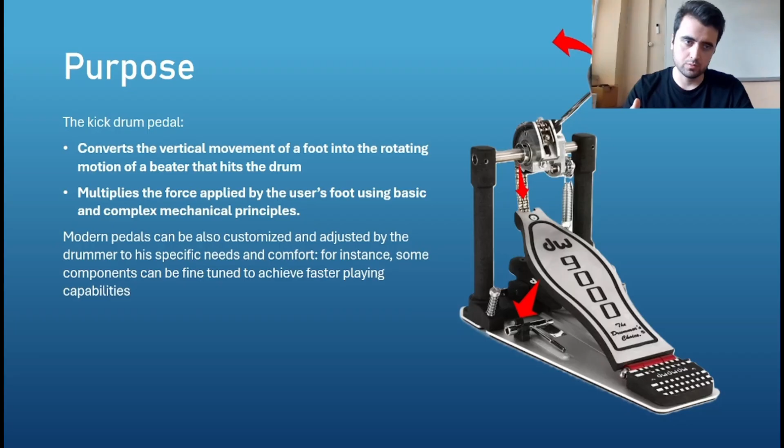Let's have a look at the working principle. The purpose of this equipment is to change the downward push of your foot into a spinning motion to hit the drum, multiplying the force that you applied.

Now the components and their purposes. The first one is the footboard, the plate on which the drummer's foot rests, which provides the transition of the player's movement into energy. There are two types: short boards, which have a separate heel piece and give a classical feel, and longboards, which are one single long piece, more sensitive and better for fast foot techniques.

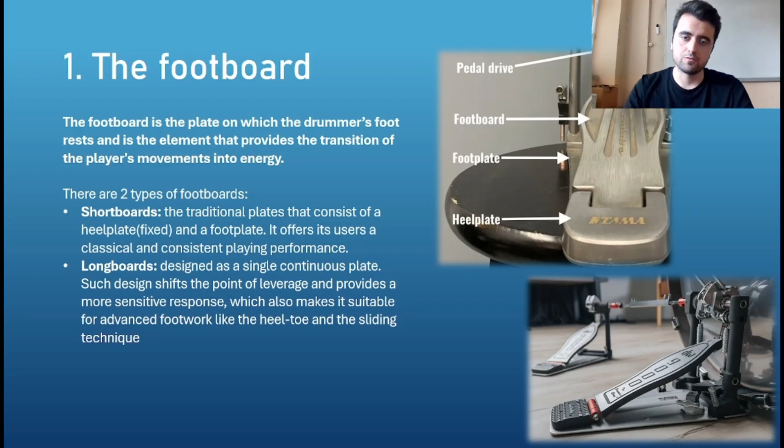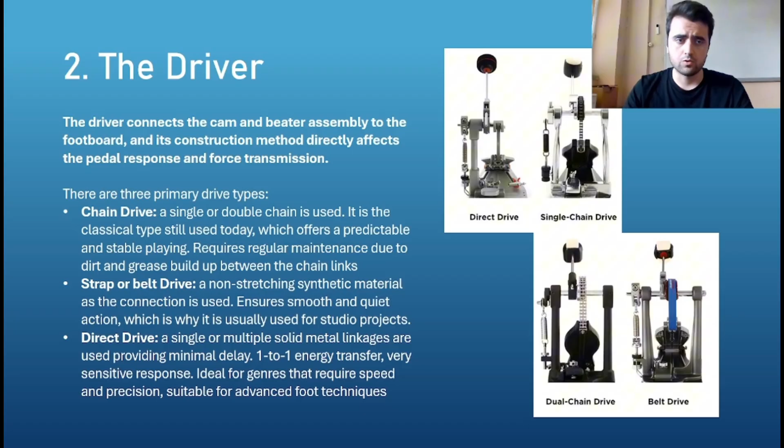The second component is the driver, which connects the footboard to the top of the mechanism. There are three primary drive types. First is chain drive, stable but needs cleaning. Then strap drives use a belt, so they are very quiet and smooth. And there are direct drives, which use solid metal for energy transfer, perfect for extreme speed.

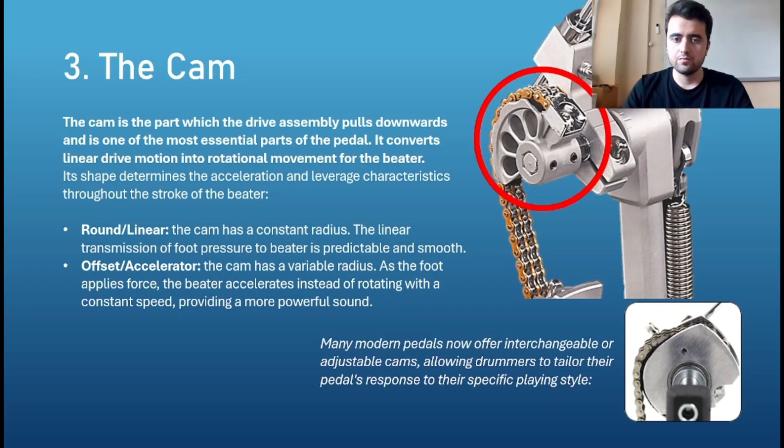The third one is the cam, which turns the pulling motion into rotation. There are two primary types: a round cam gives a smooth, regular feel, while an offset cam is shaped differently - it accelerates the beater at the very end of the stroke for a much harder hit.

The fourth one is the beater, which strikes the drum. Its material changes the sound completely. For example, felt sounds warm and punchy, plastic sounds sharp and clicky, and wood is very loud and bright.

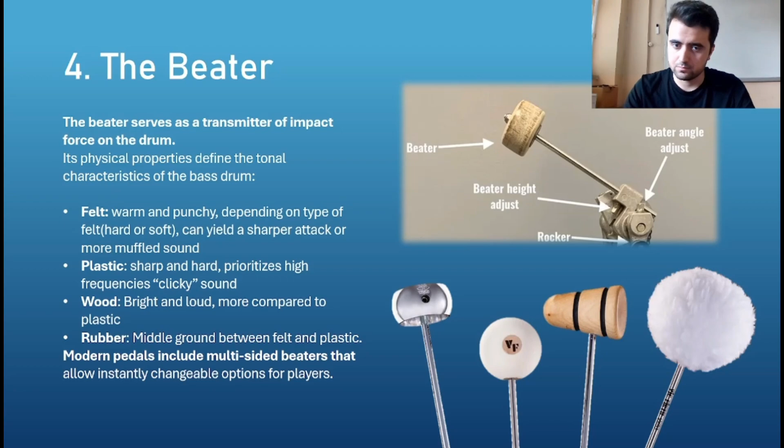Finally, the fifth component is the spring mechanism, which pulls the pedal back up. A tight spring bounces back quickly, good for fast rock or metal music. A loose spring feels lighter and smoother, perfect for the genre of jazz.

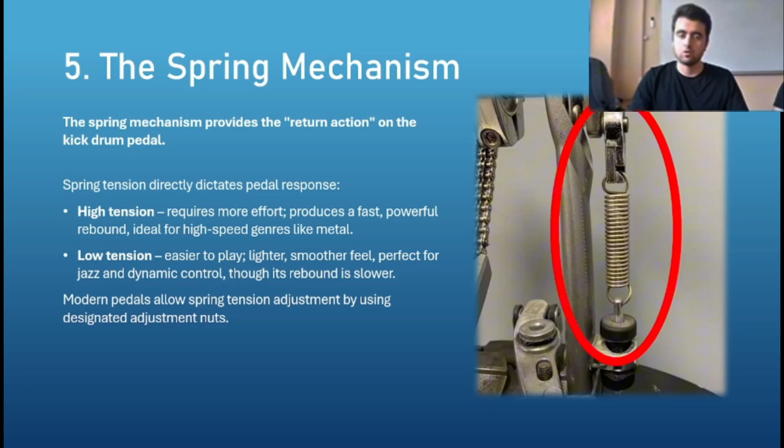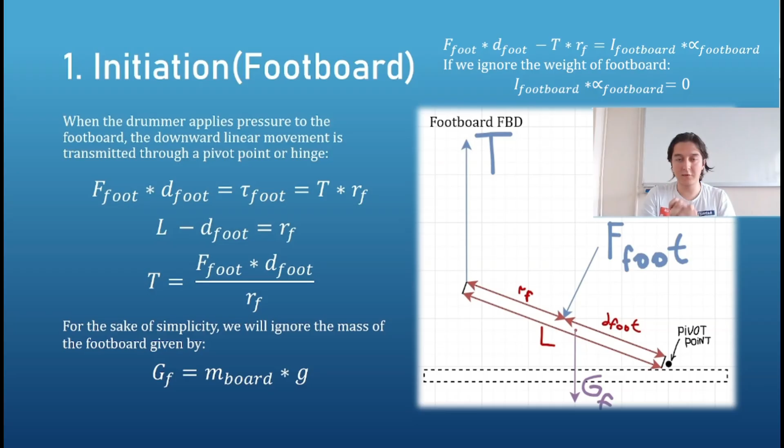I'm going to start with the first step, the initiation part: the footboard. When the drummer applies pressure to the footboard, the downward linear movement is transmitted through a pivot point or hinge. In our calculation, we're going to ignore the weight of the footboard to simplify our calculations.

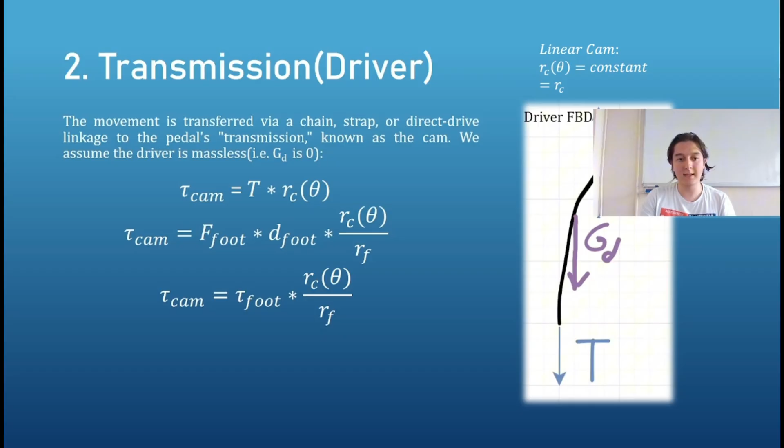In the second part, the transmission part, the driver: the movement is transferred via this driver to the cam. I'm going to show you the purpose of the cam in the next slides, and we're going to assume the driver is massless so that our tension is going to be the same.

In the third part, the conversion part, the cam part: the cam converts the linear movement into rotational motion for the beater so that we can calculate our kinetic energy. There is our torque formula: torque of the cam minus torque of the spring. We're going to ignore the torque of friction and the torque of the weight of the beater.

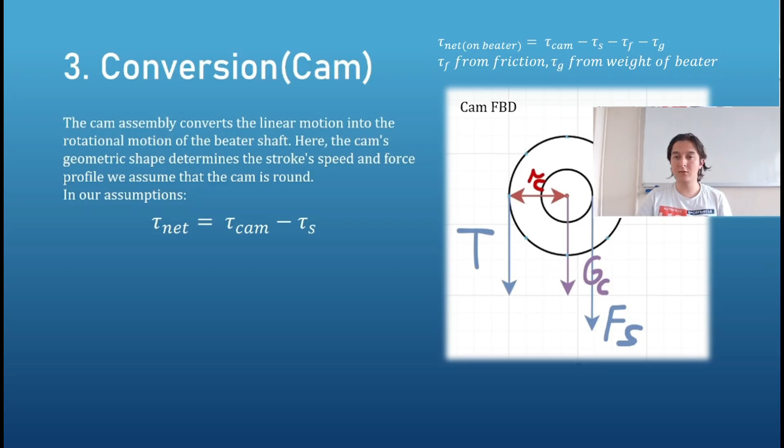In the fourth part, there is a calculation for the impact of the beater. The rotation of the shaft propels the beater forward, causing it to strike the bass drum head. By using torque and energy, we can calculate the impact force.

And we're going to put here one efficiency model for removing effects of the weight of the beater, spring, friction, whatever you assume is there. In the next slide, I'm going to show you the main purpose of the spring.

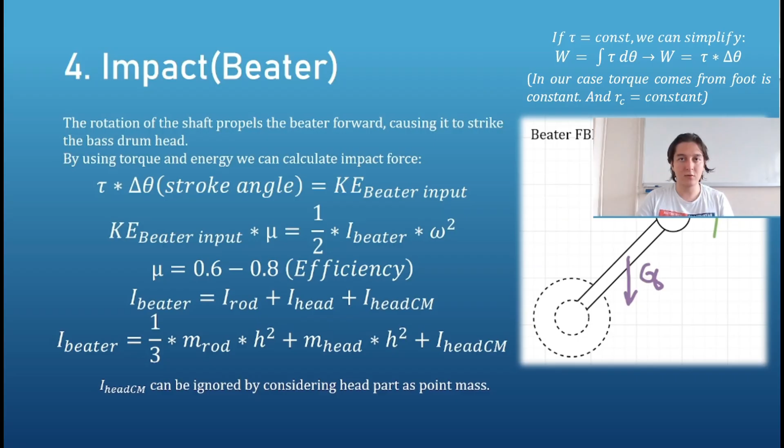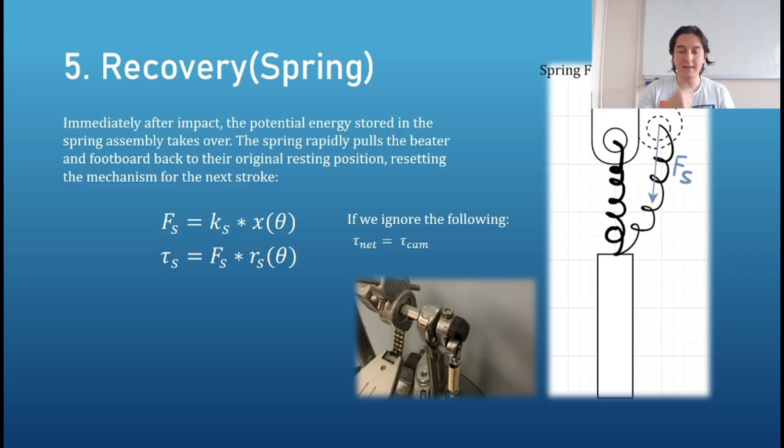Immediately after the impact stroke, the potential energy stored in the spring takes over, and the spring rapidly pulls the beater and footboard back to their original resting position, resetting the mechanism for the next stroke. For easier calculation, we're going to ignore the torque of the spring.

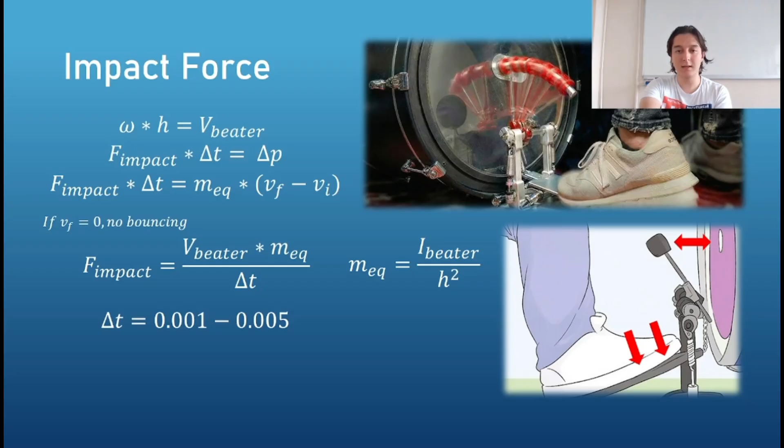In calculation of impact force, we're going to use the impulse-momentum theorem. We're going to use equivalent mass, contact time, and we're going to assume final velocity is 0 - there is no bouncing in our assumptions.

Here's one example with our assumptions and values. Using these values, you can calculate your impact force as 246 newtons. But if you change your contact time to 3 milliseconds, your impact force is going to be 3 times less. You should know that before your calculations - contact time highly affects your calculations.

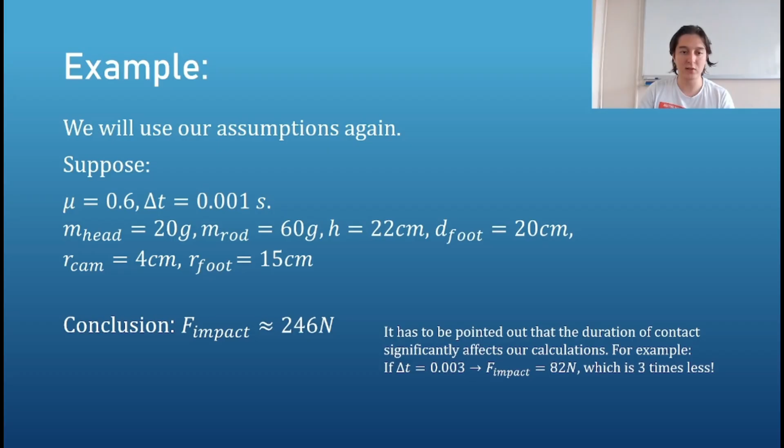Kick drum pedal is one of the hardest working mechanical parts in the music world. It transfers the power from the drummer's foot to the drum, and the choice of materials must provide a balance between factors such as durability, strength, and lightness. Let's start - these are some requirements at material choice: strength, lightness, durability, and cost.

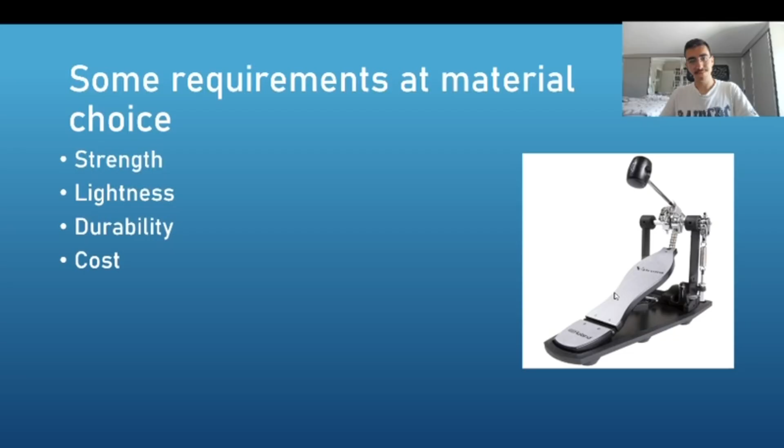This is the kick drum pedal, as you can see. The first part that I'll introduce the materials of is the footboard. The footboard is made of cast aluminum because aluminum is beneficial for lightness and speed. It also provides the pedal with high acceleration by minimizing inertia, and offers excellent resistance against corrosion. The footboard part is here.

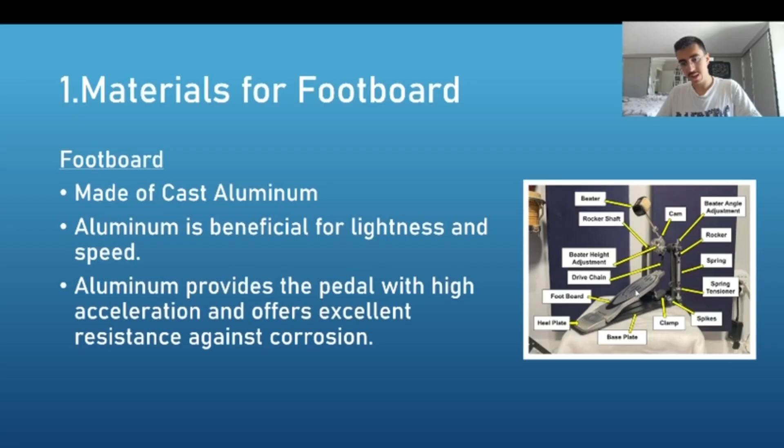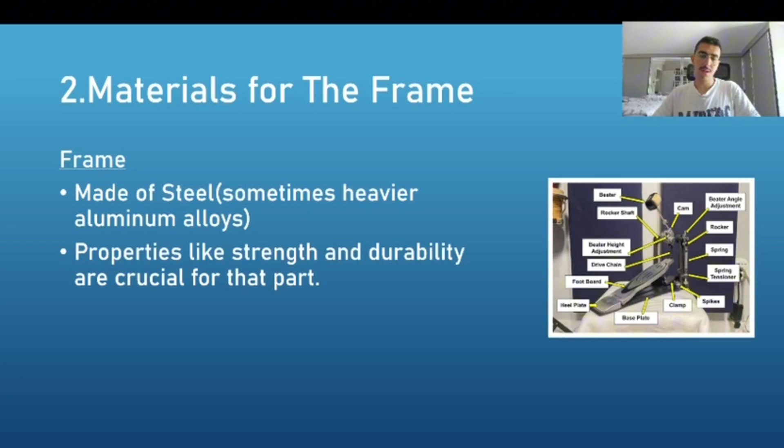Another part is the frame. The frame is made of steel, but sometimes it can be made of heavier aluminum alloys. The properties like strength and durability are crucial for that part.

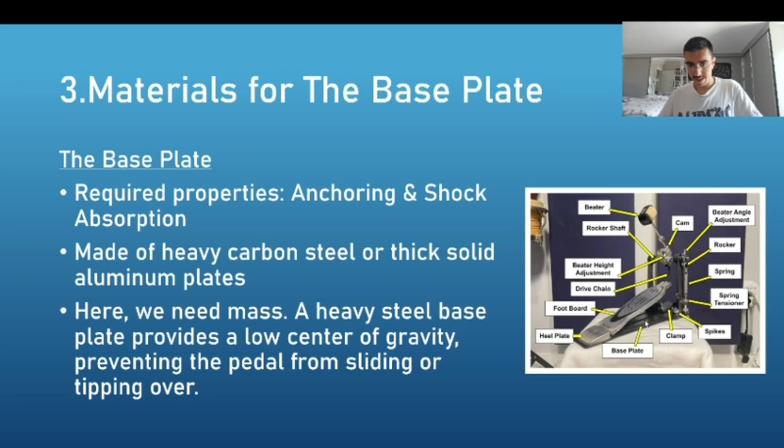The third part is the base plate. The base plate is made of heavy carbon steel or thick solid aluminum plates. The required properties are anchoring and shock absorption. We need mass there, because a heavier steel base plate provides a low center of gravity and prevents the pedal from sliding over. The base plate is here. And the last part is the heel plate.

The heel plate is made of cast iron, steel, or heavy duty aluminum blocks. The priorities are durability and pivot stability. Because that part doesn't swing into the air, lightness is less critical and the main focus is on durability. The heel plate is here.

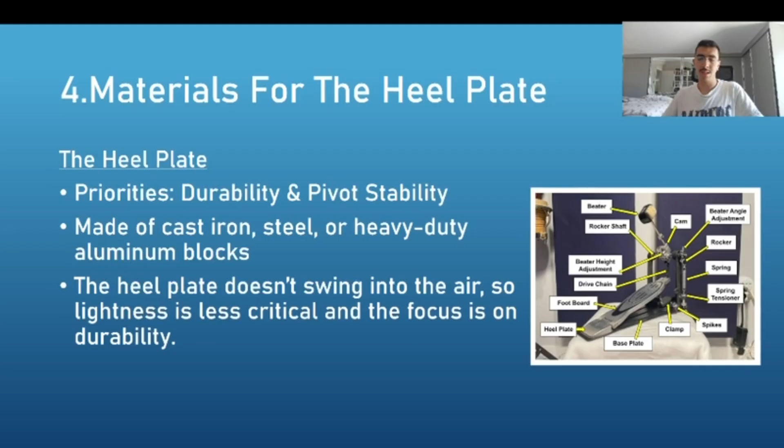Hello, my name is Batu Ada and I'm with the third group on the project on the kick drum pedals. I will be presenting the rest of the materials section, mostly focusing on the materials used in some of the moving parts.

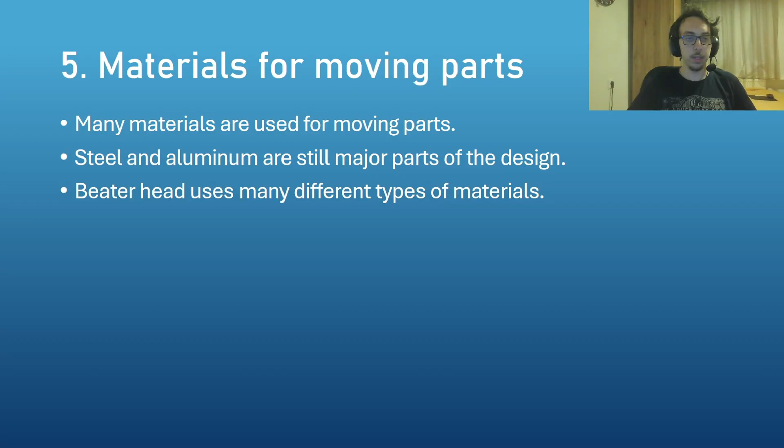They are usually made out of steel and aluminum, but other materials are used as well. We will also focus on the beater head towards the end of the section because many different types of materials are used there. So let's get started.

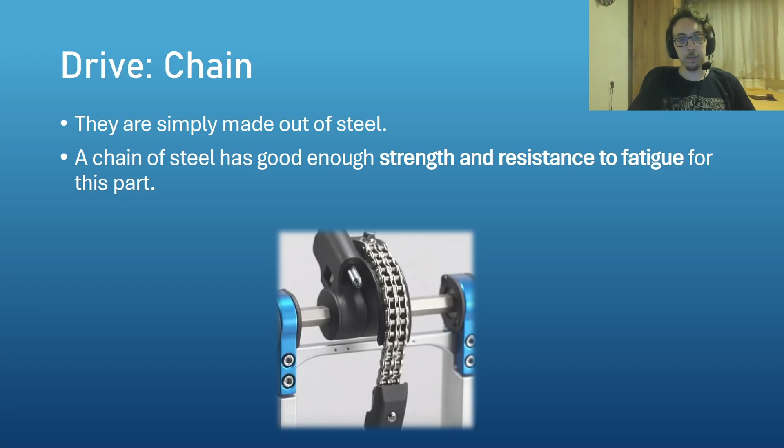Chain drives are usually made out of steel. This is because they have good enough strength and resistance to fatigue, which is good enough for this purpose.

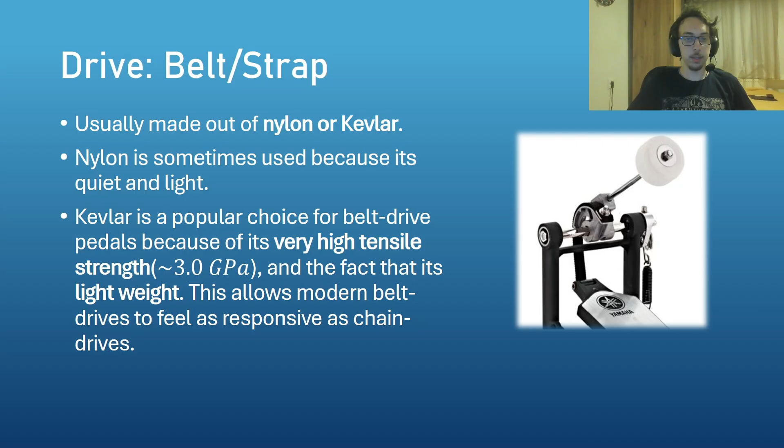Belt or strap drives are usually made out of nylon or Kevlar. Nylon is sometimes preferred because it's quiet and light and quite cheap. Kevlar is a popular choice for belt drive pedals because of its very high tensile strength and the fact that it is very lightweight, which makes it great for this application.

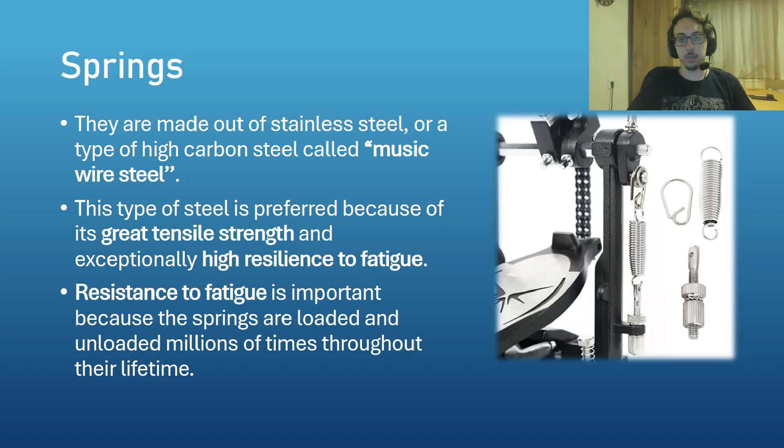Springs are made out of stainless steel or a type of high carbon steel called music wire steel. This type of steel is preferred because of its great tensile strength and exceptionally high resistance to fatigue. Resistance to fatigue is important here because springs will be loaded and unloaded millions of times throughout their lifetime, so they need resilience to that.

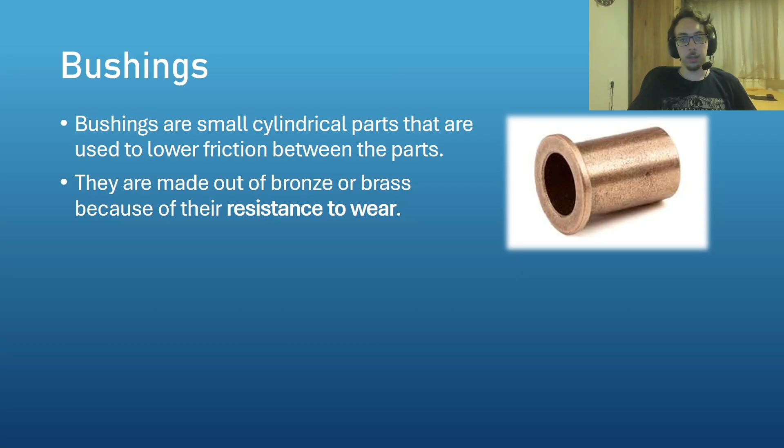Bushings are usually found in sections between parts where there is a lot of friction going on. These provide some resistance to that friction. They are usually made out of bronze or sometimes brass because they need to have good wear resistance since friction is involved.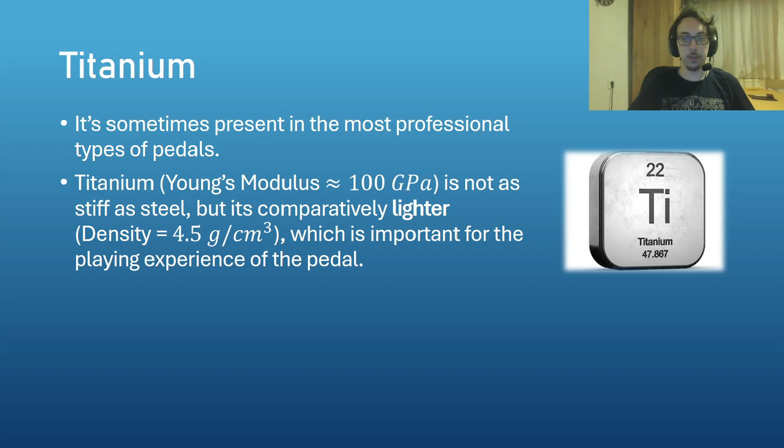The beater heads can be made out of many different types of materials, and the material selection is very important because this will decide the sound that the drum will make in the end. Some of these materials are felt, plastic, wood, and rubber.

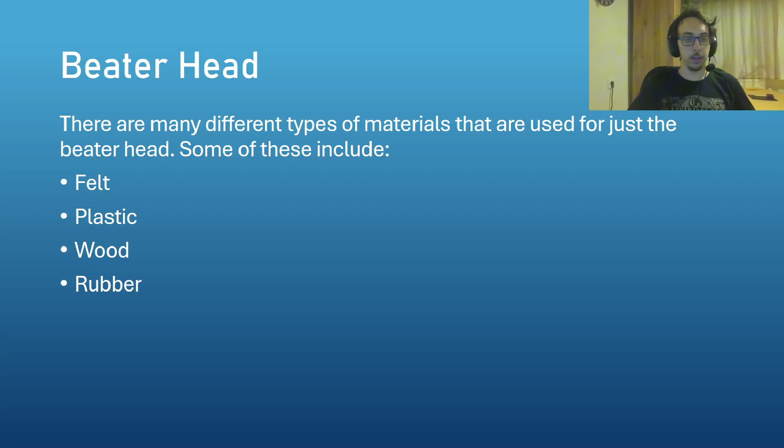The most common and traditional beater material is felt. Felt is soft and tends to deform, making the sound warm and well balanced. Plastics are usually much harder compared to felt, which makes their sound sharp, hard, and clicky.

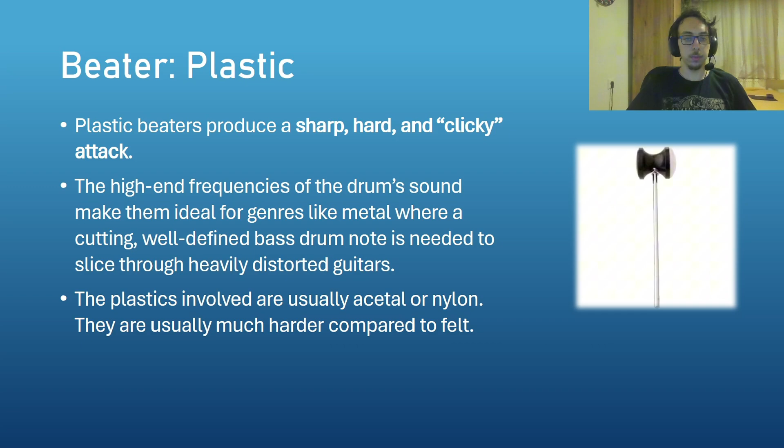The plastics involved are usually acetal or nylon. Wood is even stronger compared to plastic, which makes its sound more like a thwack than a click, unlike plastics. Rubber is softer than plastic but harder than felt, which makes it a good middle ground in between the two. That's the end of the materials section.

The market research section will be continued by Mark.

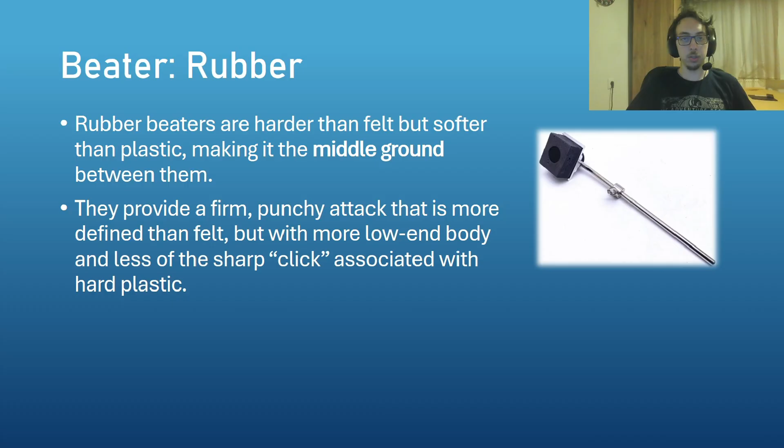Hello everyone, this is Mark. I'm going to introduce you to the market research part of the kick drum pedal project.

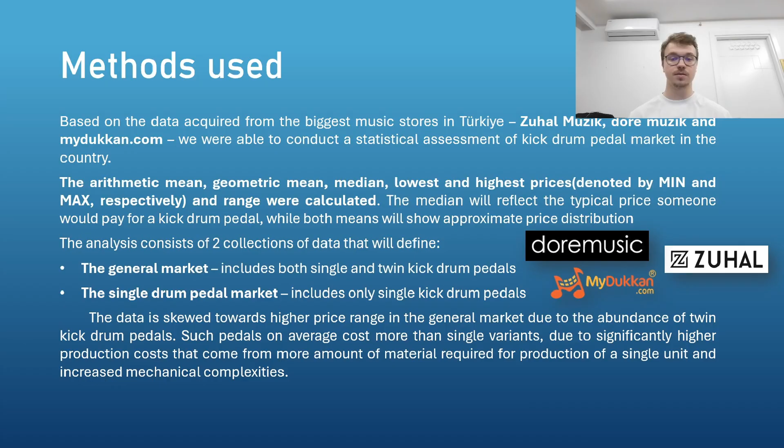We collected data from the biggest music stores in Turkey: Zuhal Müzik, Do-Re Müzik, and mydukkan.com. We calculated things like means, medians, and ranges, and analyzed two data sets: the general market, which includes all kinds of pedals, and the single kick drum pedal market, which includes only single kick drum pedals. We must say, however, that the data for the general market is skewed towards higher prices due to the abundance of twin kick drum pedals. They cost more because of their mechanical complexities, and therefore they are costing more.

Most of the pedals are in the 5 to 20,000 liras range, with a few highly expensive outliers that skew the entire statistics. This behavior also reflects multiplicative growth in price rather than linear, which means that manufacturers, when trying to introduce improvements in their products, make the final market price increase proportionally by a factor and not by a fixed amount. Now, if we remove the double drum pedals, we get a much more accurate assessment of the drum pedal market in Turkey.

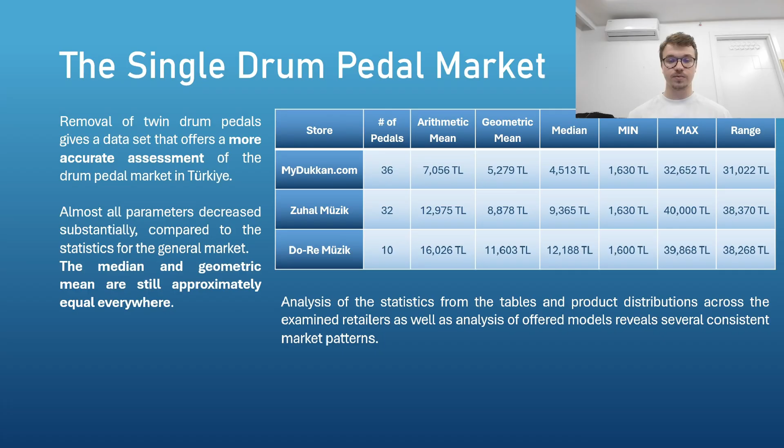We can see from the table that all values decreased, but the geometric mean and median are still approximately equal, meaning that the market structure is relatively the same. We also did a product offerings analysis and revealed some of the market trends. For example, mydukkan.com has the lowest median and provides mostly budget to intermediate level equipment from original equipment manufacturers and more recognized brands like Mapex, Tama, and DW.

Zuhal Müzik offers the most extensive selection of kick drum pedals by far, most of which are dominated by Tama or Pearl, which are brands well known for their quality and history. Do-Re Müzik, on the other hand, is focused towards the more high-end spectrum of drum pedals, providing flagship instruments of Yamaha, Sonor, and DW with exceptional build quality and features.

At the moment of preparation of the project, the most expensive pedals are from the Pearl Demon Drive XR series, the P3500D, and the double pedal variant 3502D. Both are the flagship models of Pearl, costing 44 and 99,000 liras respectively.

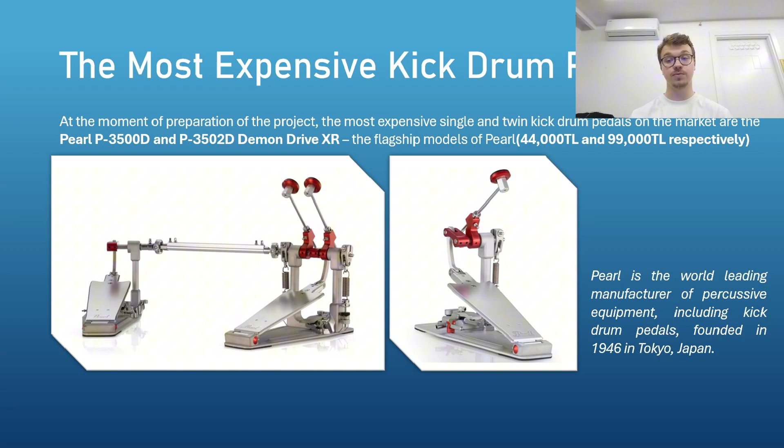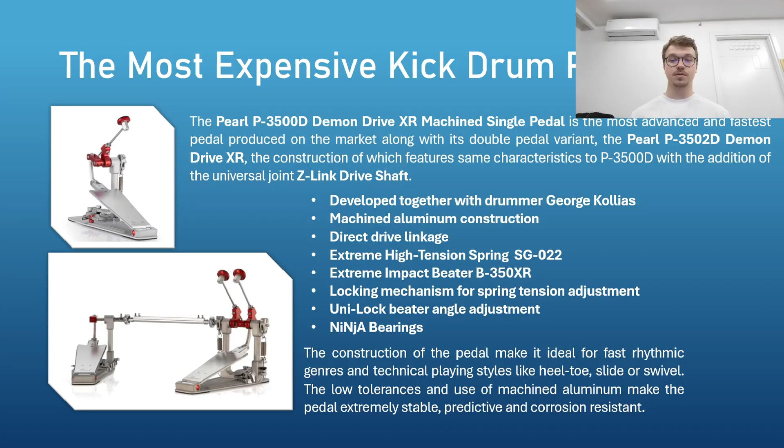The Demon Drive XR series represents the most advanced and the fastest pedals on the market, which include specially designed machined aluminum construction, direct drive linkage and ninja bearings, various adjustability options, and it was developed together with professional drummer George Kollias. There are several factors that highly affect the manufacturing costs and the price of the pedal.

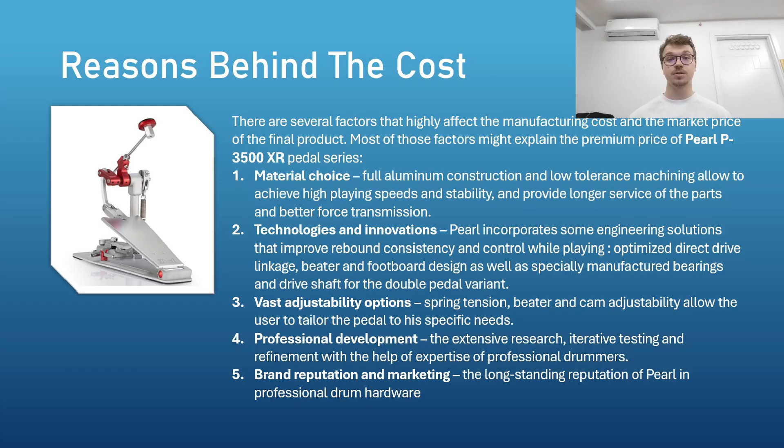One of them is material choice, the full aluminum construction. Next are some engineering solutions like optimized direct drive linkage, beater and footboard design. There are also vast adjustability options and professional research and development, and of course the long-standing reputation of Pearl in professional drum hardware. Now Ömer Bayram is going to introduce you to the CAD drawing of the kick drum pedal.

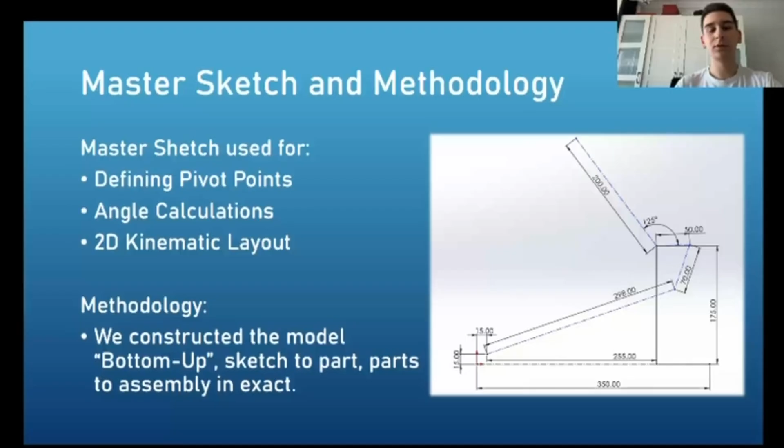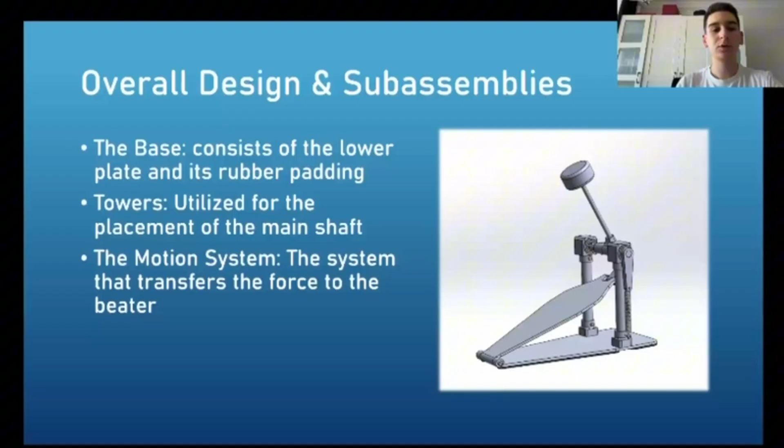The base is made out of 5mm thick aluminum sheet and constructed using sheet metal. Below the base is a rubber padding, ensuring the base does not slip, as you can see in this dark color. The plate has been bent in a way that it forms the outer part of the pedal hinge. This is the place, to be exact. We bent the edge of the sheet so that it can form a hole for the main screw of the hinge.

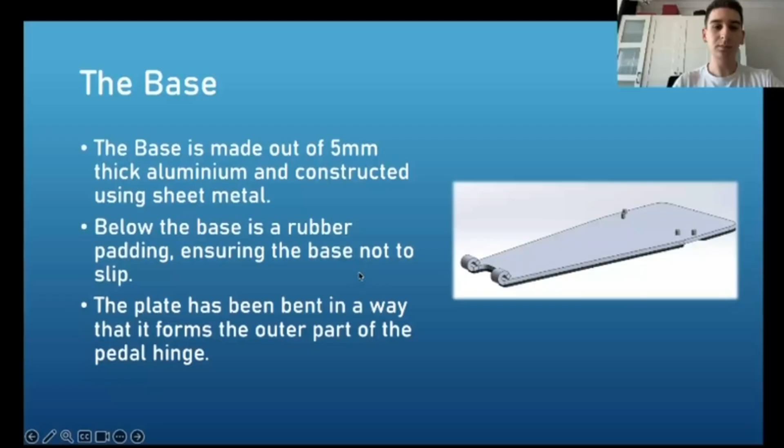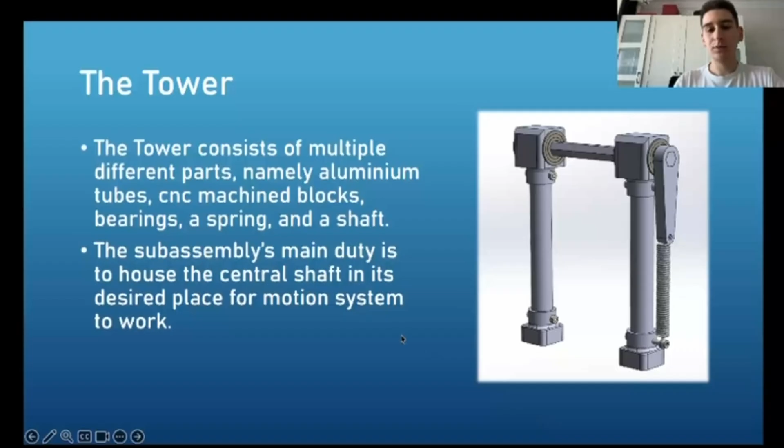The tower consists of multiple different parts, namely aluminum tubes, CNC machined blocks, bearings, a spring, and a shaft. The sub-assembly's main duty is to house the central shaft in its desired place for the motion system to operate. This is the overall shape of the sub-assembly. Parts of the tower, to better visualize it: the spring link, the 2 CNC machined parts, and this aluminum tubing with 2 holes. Also, these CNC machined parts have chamfers and radiuses.

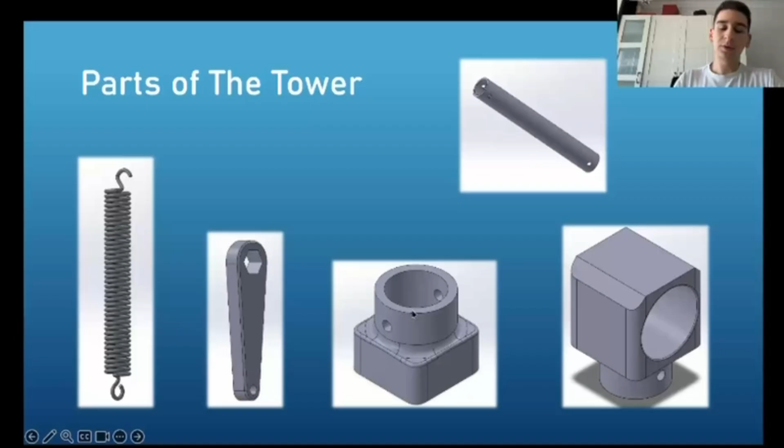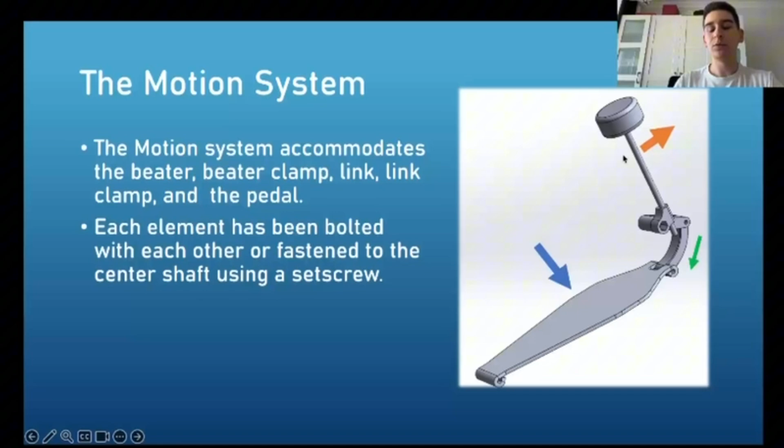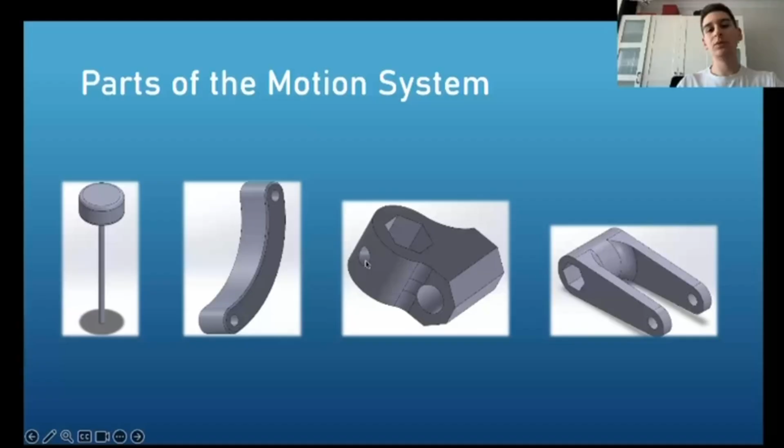Parts of the motion system, to better visualize as well: the beater, the link, and the clamps. The clamps have these holes for the set screws to be fastened on the central shaft. Also, this is the pedal. Like the base, the edges are curved so that it can form a hole to be part of the hinge.

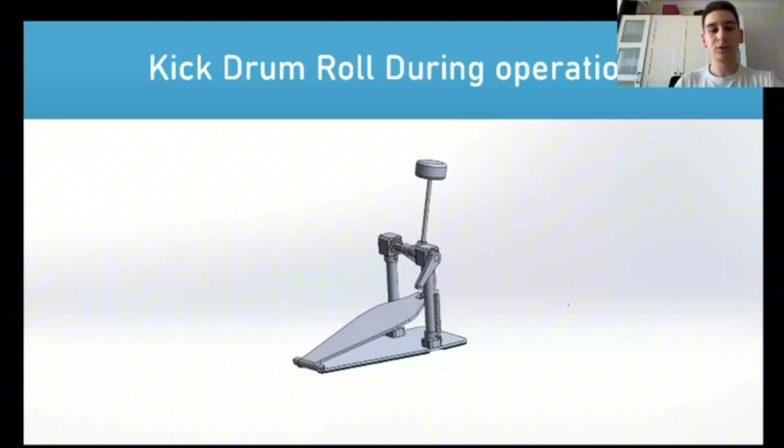Lastly, the kick drum pedal during its operation. As you can see, when the force is applied, the pedal pulls the system back so that the beater can move forwards.